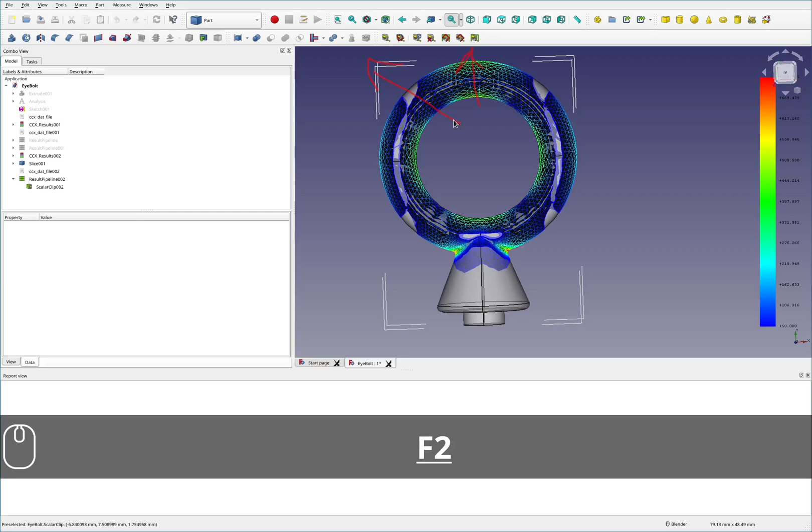Hi, welcome back. So in the previous video, we explored how an eyebolt from McMaster-Carr is affected by pulling straight up like it's designed for, and then also pulling at the 45-degree angle, which is the maximum allowable offset angle from vertical. And I figured that in this video, we would expand on that.

So in the previous video, we simulated an eyebolt and it's physically connected to the ground rigidly. And then we were pulling up here, pulling over to the side, things like that. And there are a few things that this doesn't take into account. So when you have an eyebolt like this, typically it's bolted into something. It's not just attached to nothing. So it's bolted into something, right? And it's got this thread here.

And these threads have a preload force that's pulling the entire eyebolt into the material. And what we didn't simulate was the material here flexing and kind of bending down as the eyebolt gets pulled into it. And that potentially could help with some of the forces that we were seeing, particularly in this kind of bottom section down here.

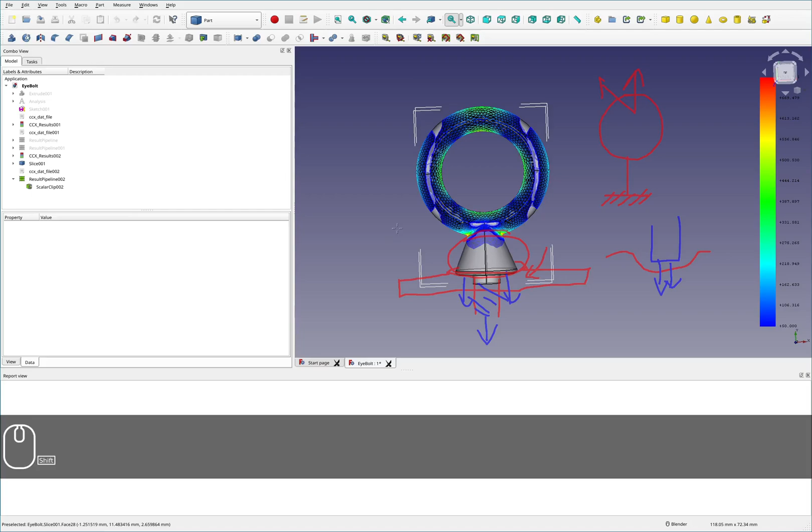So I figured today we would expand this eyebolt simulation to contain the plate below and also the preload. And we'd see if that makes any difference to our overall findings. I expect that it doesn't, but I think this is a good exercise. The reason that I think it won't affect much is because none of the effects that we're seeing are in this area down here that is being affected by our changes.

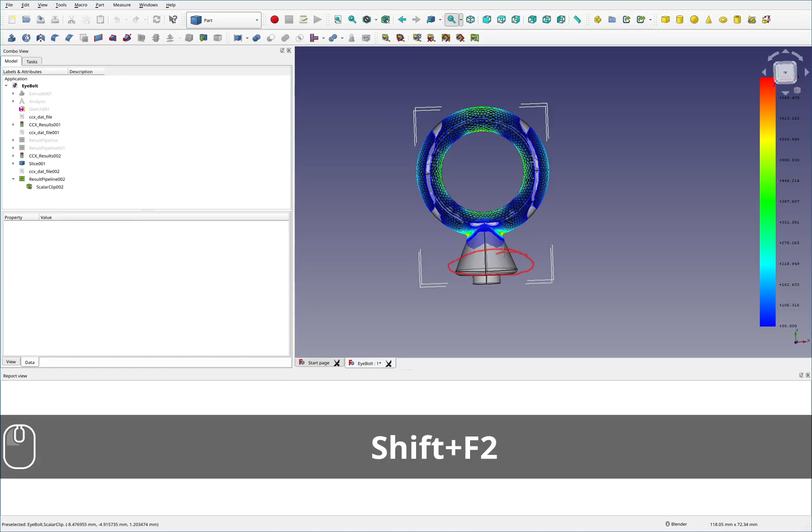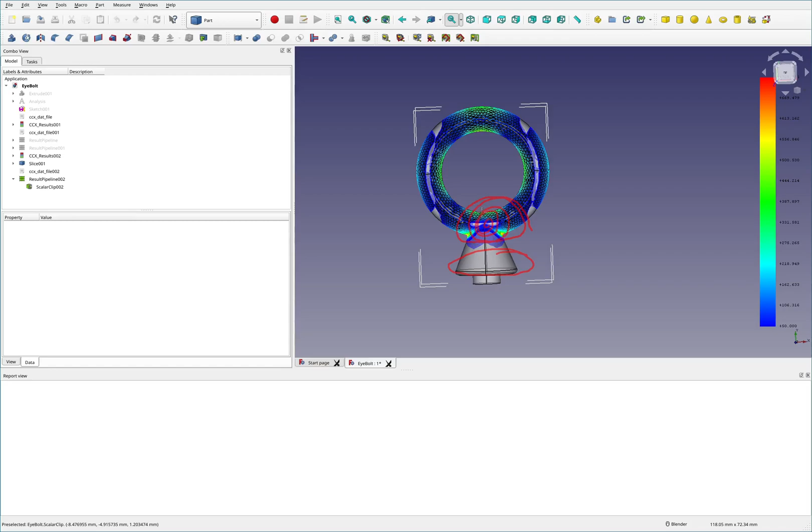So I think what we would see is potentially a reduction in force in this area. Maybe it ends up more in compression and less in tension. But overall, this concerning area up here, where the eyebolt goes from being straight up to being the circular thing, I don't think we're going to see all that much change there. But I think this is an interesting topic, so we'll move forward with it.

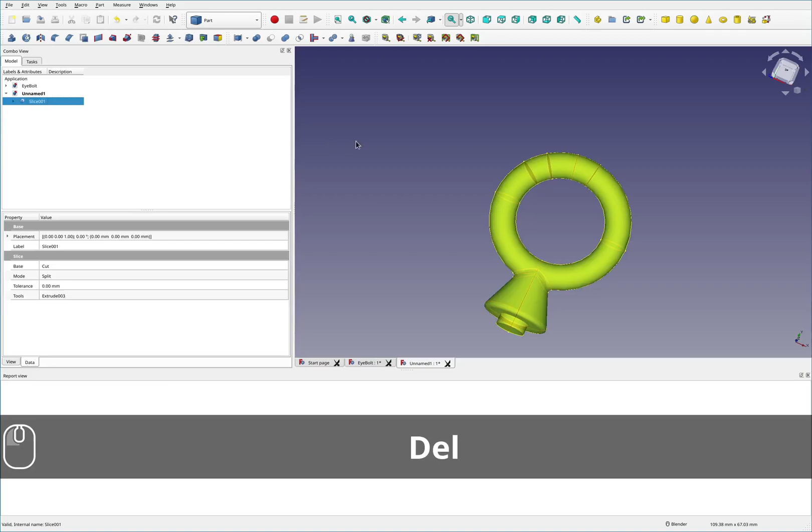Now I'm going to start by making a new file, and then I'm going to come over to the eyebolt file from last time, and I'm going to link the slice here once I find the link button. Here we go. And I'll just drag it over to the other file. So now we have two parts, I guess. I'm not sure what the second part is. Let's see. If we delete one of them, nothing seems to change. So that should be okay. I'm going to turn the opacity off on this part. There we go.

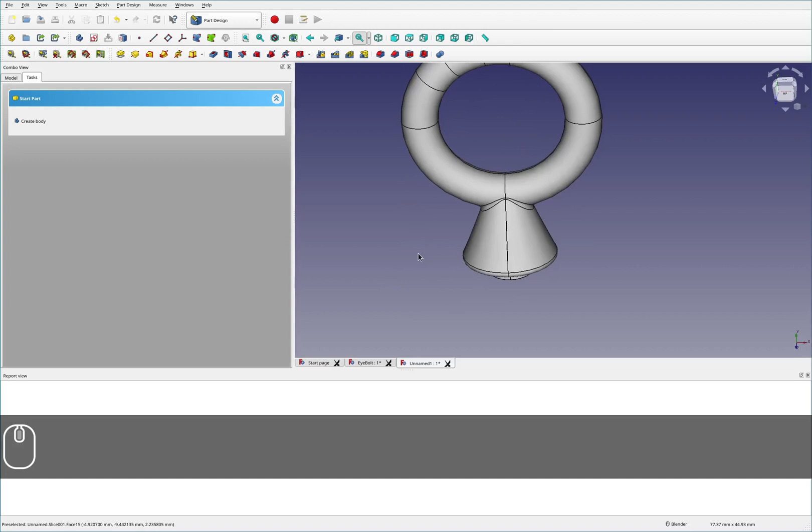And then I'm going to do a couple of things. First, I'm going to switch over to Part Design, and we're going to model this plate area that this is going to be bolted into. And actually, I think I will model this not as a square, but as a circle. And then I'll have maybe 1.5 diameters on each side so that the plate has some flex to it. And this plate thickness is going to be pretty thick. I'm not quite sure. I'll just eyeball it and we'll see if it looks good in the simulation. But that is the plan.

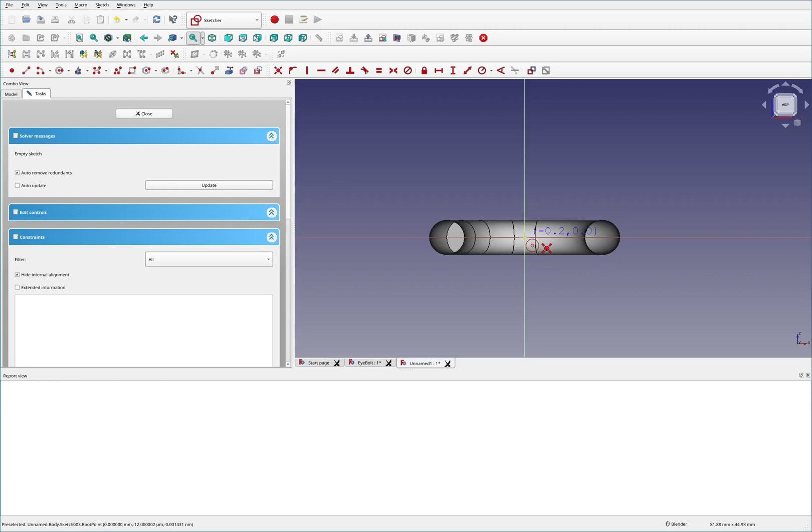So I'm going to make a new sketch here, and I'm going to cut away, and we'll make two circles. I'm not going to put material where the eyebolt shaft would go. So let's get rid of the cut away, and I'm going to grab the outside of the eyebolt. Let's see if I can grab that. It does not like me grabbing that. Does it like me grabbing any of this? It does not. So I guess we won't be doing that today. We'll just be eyeballing it.

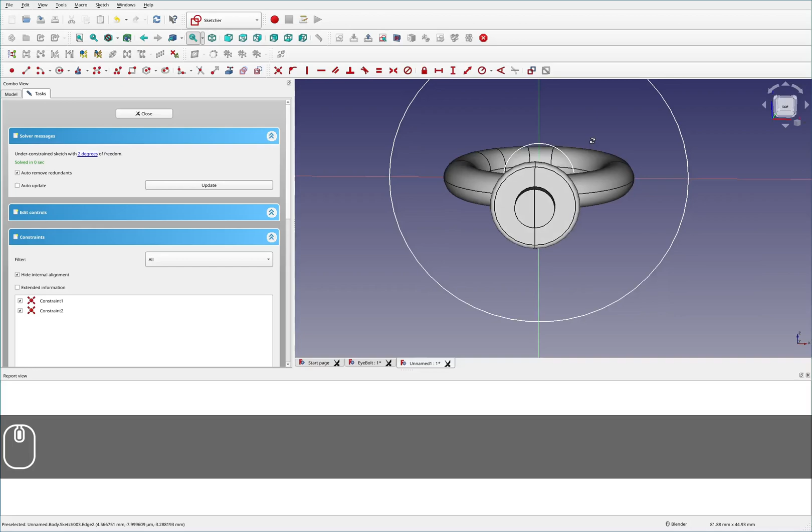But I believe, going back to a page we had from before, this is the quarter-20, so it's 1/4 inch in diameter for the thread size. And the McMaster-Carr model without thread is modeled such that the diameter is the major diameter of the thread, so the threads would be cut into this part if it had threads.

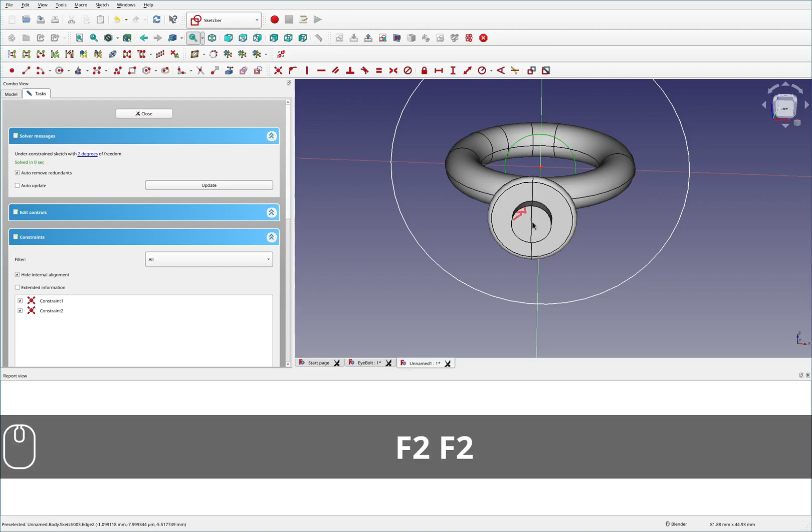So we will grab this and give it a diameter, and the diameter we'll say is 1/4, and then, oops, we need 1/4 inch. That was 1/4 millimeter. So 1/4 inch, and then we'll add just a little bit so that it's not on top of the eyebolt. Let's see if I can grab this.

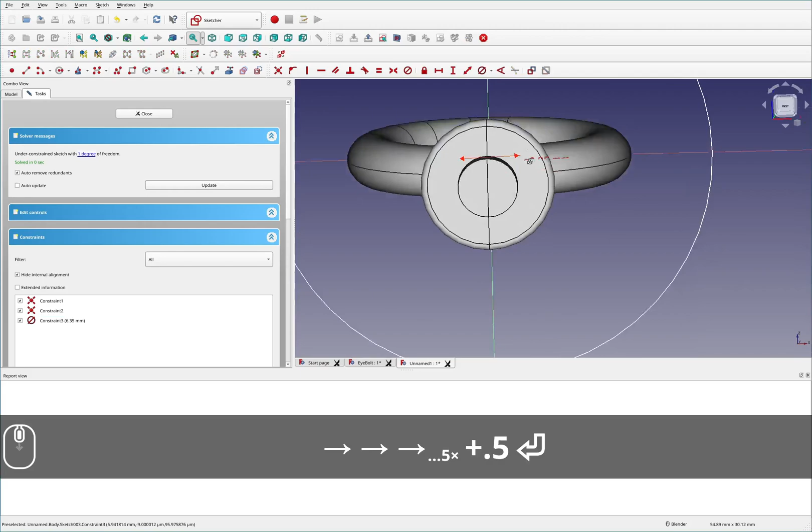Okay, so we'll add, I don't know, 0.5 millimeters. So that should be enough to get it off of the eye bolt. And then for this one here, let's see if McMaster has dimensions for the width of that. So they say that is 0.563 inches wide.

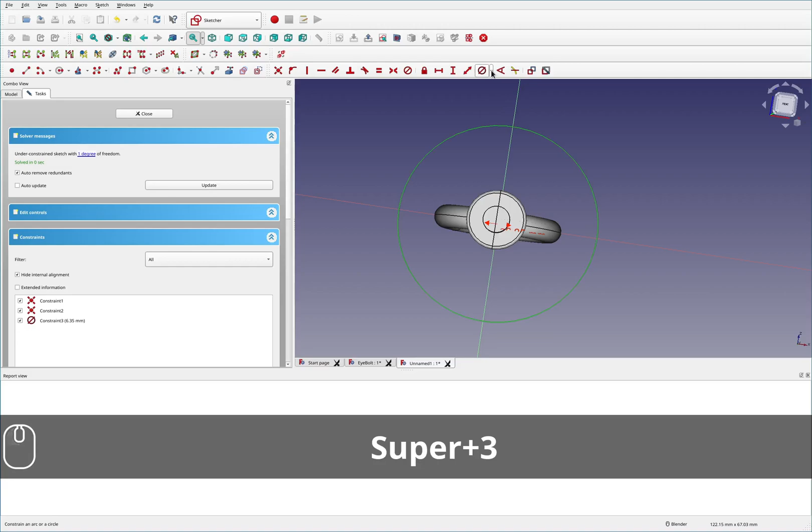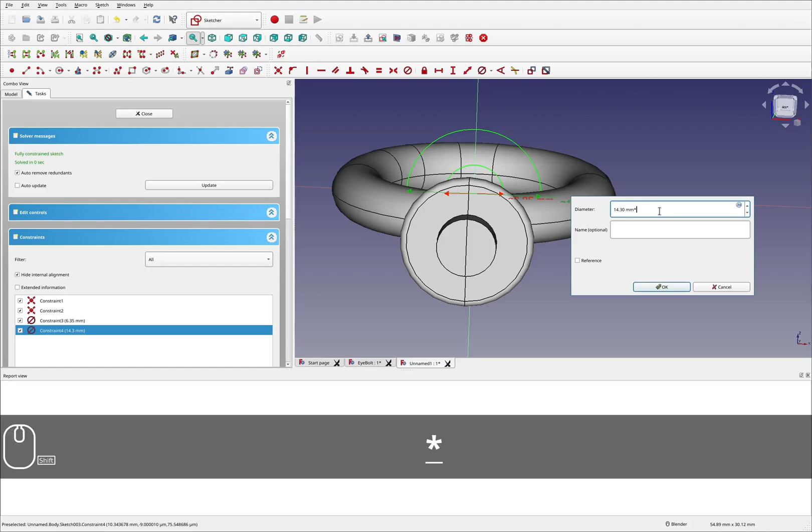So we come over here, and I want the diameter to be 0.563 inches times, actually we'll check and make sure that looks about right. And yeah, that looks about right. So come over here and grab this. And if you recall, I need another 4 diameters. Did that do anything? That did not do anything. So let's grab it again. And we need times 4. Oops, maybe it's because I put it on the right side of the number.

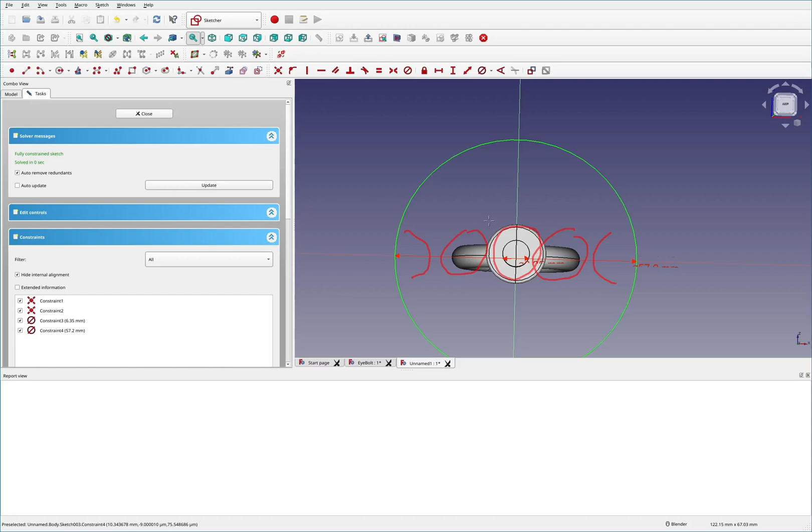So times 4. And the reason I chose 4 there is so that I have 1 diameter in the middle, and then 1 on each side, and then an extra half diameter past that. So I think that's going to give us enough area to properly model the plate without having the boundary conditions affect too much.

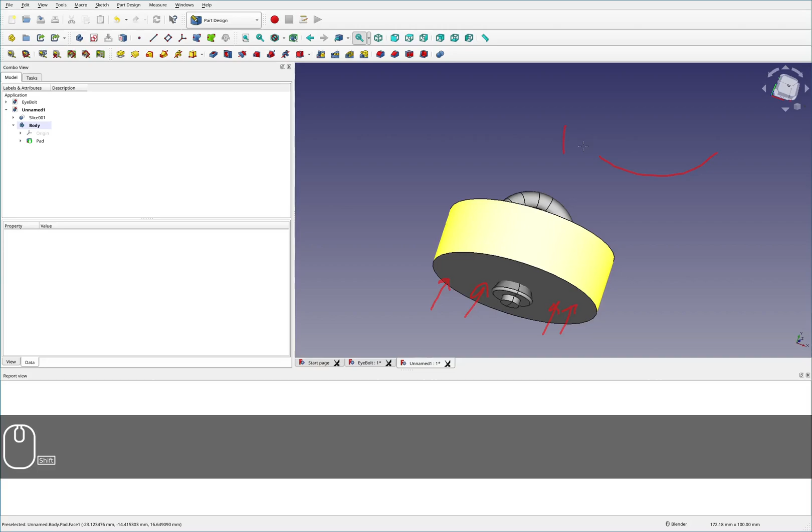So then I'll pad this, and let's say 35. Oh, that's pretty thick, maybe not that thick. How about 20? I want it thick enough that the boundary conditions don't affect the rest of the plate. But since I'm not planning on pinning the bottom surface here, I want it thick enough that it's not going to bow down too much in the middle, because that wouldn't be a great simulation either. But looks like we're doing good here.

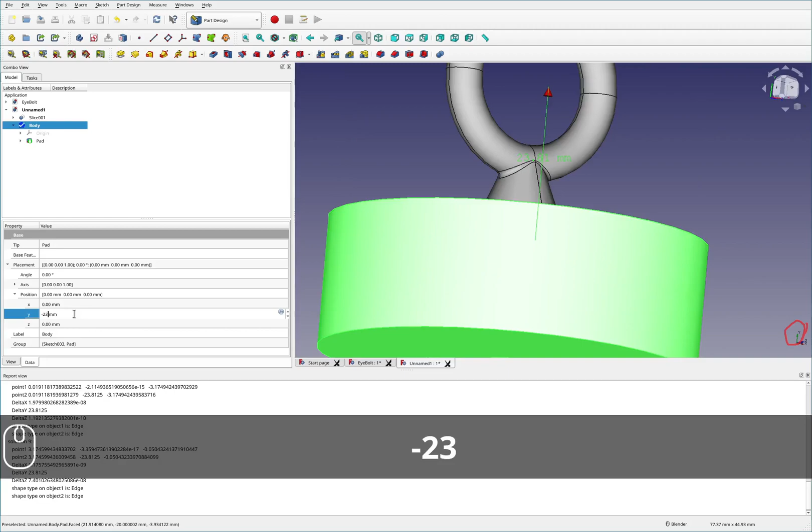So I'll grab the measuring tool because I need to move this down to where it actually is supposed to go. We'll measure the distance between these two, and 23.81 millimeters is the distance we need to move it. So come over here to body, placement, position, and I need to move it in the Z direction, or the Y direction. So we come over here to the Y direction, we need minus 23.81, and those two should be exactly lined up now.

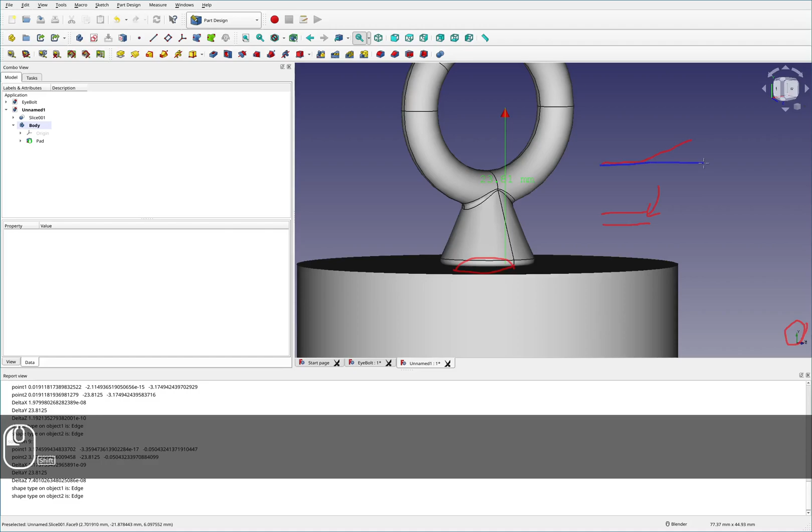They look pretty good. And the reason I am not offsetting this down, so there's a little bit of gap in the middle, like I did with the inside eye bolt part of it, is because I'm pretty convinced that because of the preload, these two surfaces are going to end up in contact. So I feel pretty confident that we can just bind these two surfaces together using the meshing tool, just by putting them on top of one another.

Instead of doing this type of thing where we'd have to use the contact tool, and that adds a lot of complexity to solving it. It makes your mesh more difficult to solve. There's more constraints required. It's more difficult to converge. So it's just a big hassle, and I want to avoid big hassles at all costs. But I think we're looking good here.

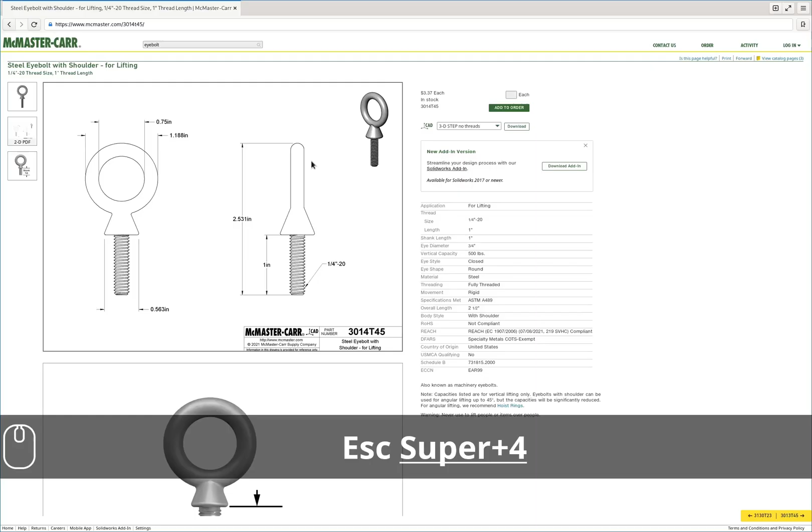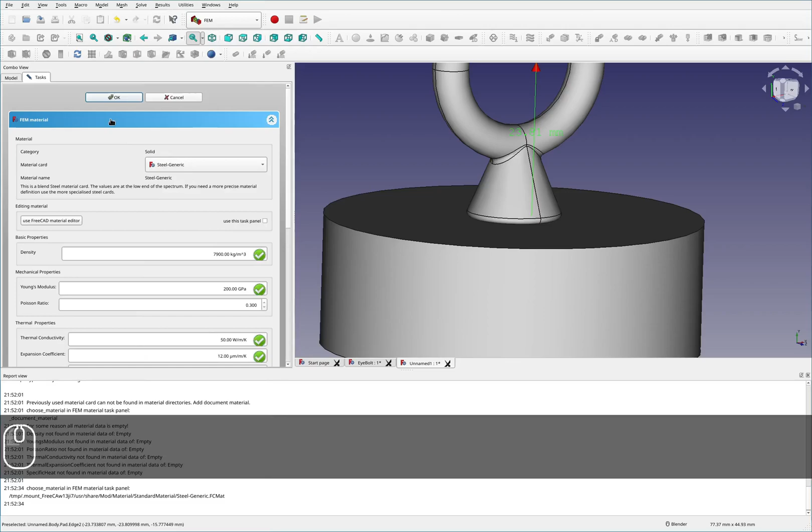So I'm going to switch over to the FEM workbench and then get an analysis block and a material block. And if you recall here, I believe this part is steel. Yep, it says right there, it is steel. So should be good to just grab steel generic. Let's see, where is steel generic? Here it is. Okay, so both these parts are steel generic.

I think that's okay, since the eyebolt obviously is steel, but then the plate is not super important for the simulation because it's so thick. It wouldn't really matter what material it is as long as it's got some amount of stiffness. So we've got that. We need some boundary conditions here. So grab the fixed boundary condition, and I'm going to fix the outside of this.

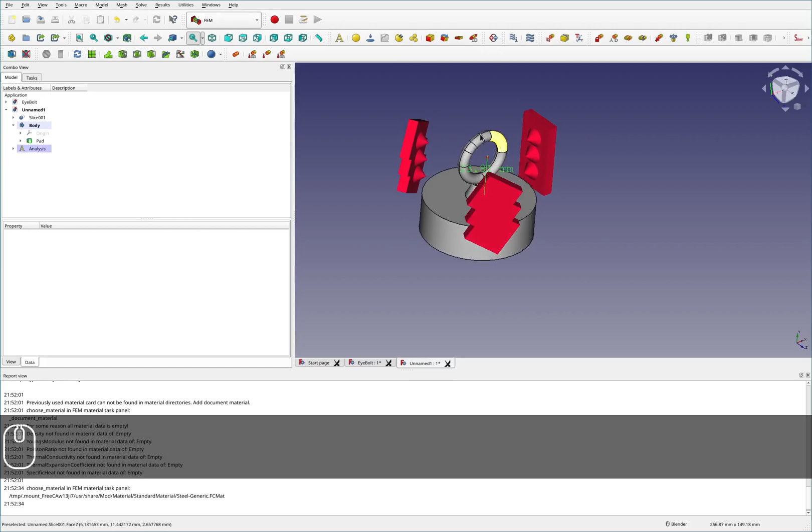And let's see, grab the force boundary condition. We will grab these two faces here. And then for the direction, I need to grab the sketch with the direction in it. I believe it is this one. So grab the link tool, and we will drag that one onto this other project also. Once again, it's imported two bodies. So I guess we will leave it at that. Open up the analysis and the constraint for the force. We will select a direction.

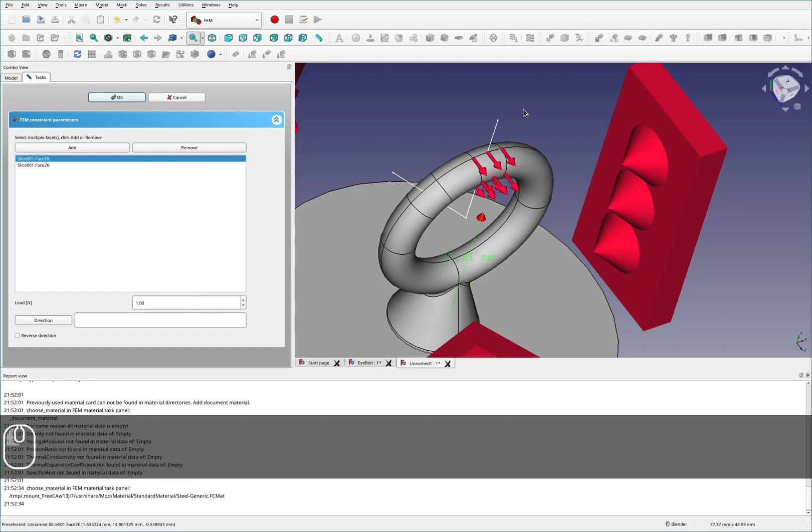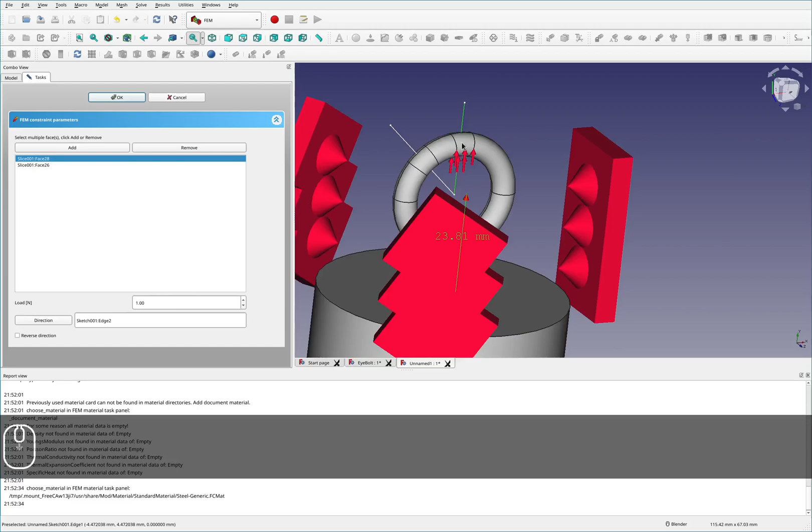Let us see. Direction does not like it. My guess is it's something to do with this second sketch. Let's delete that one and we will base it off the original. And select that. Direction, yes, that was our issue. Okay. And then, of course, we need the preload force.

So I'm going to look up the preload for a quarter 20 clamping force. Clamping force is a similar thing to preload. And let's see, these guys say quarter 20 clamping force is approximately 500 pounds. So let us move forward with that assumption.

Sorry that took so long. I probably should have prepared that.

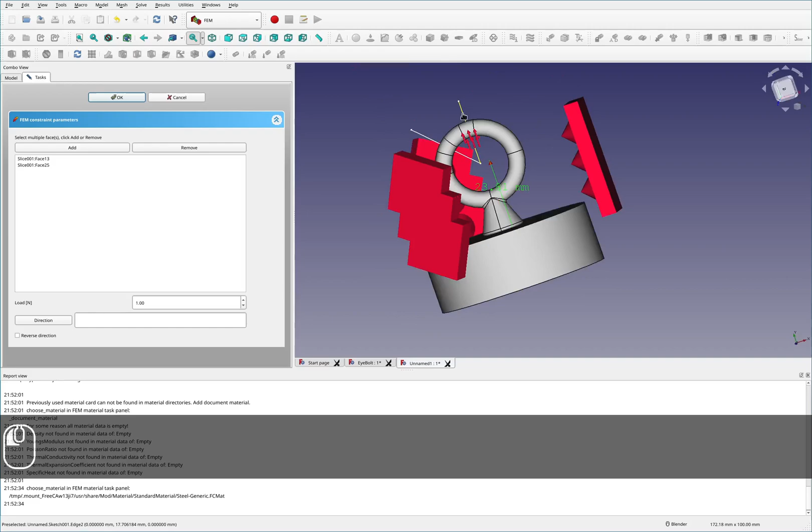And let us see. Grab the force constraint over here and grab the surfaces on the bottom. The direction can be this one, but in the other way. Okay, and the force in newtons, so we need pounds to newtons. Let's see, pounds to newtons, and 500, which is 2224 newtons.

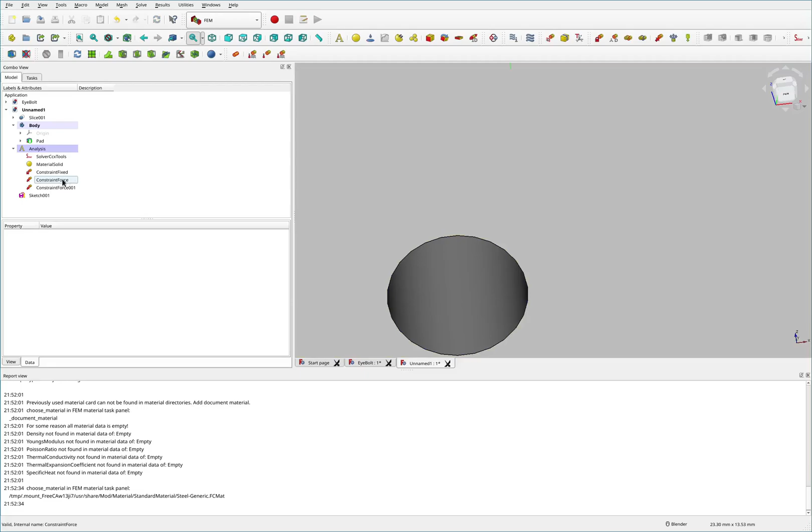So 2224 newtons. Okay, and if you recall back to our McMaster-Carr bolt, the vertical capacity is also 500 pounds. So that is 2224 newtons also. So we will put 2224 newtons in the vertical direction.

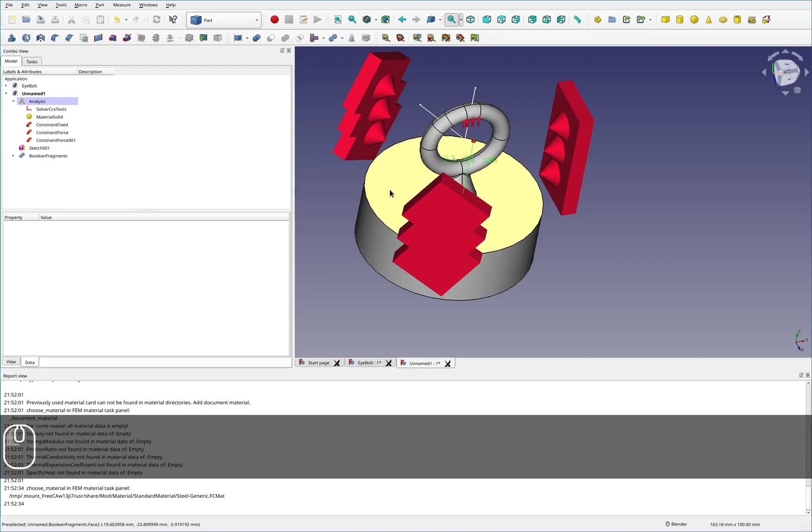Alrighty. And lastly, all we have to do is mesh our system. Oops, I've actually forgotten to combine these two things together. So we'll do that quickly. Come over here to Part and Boolean Fragments to merge the two shapes together. And let us see, we probably have to go through and fix our constraints.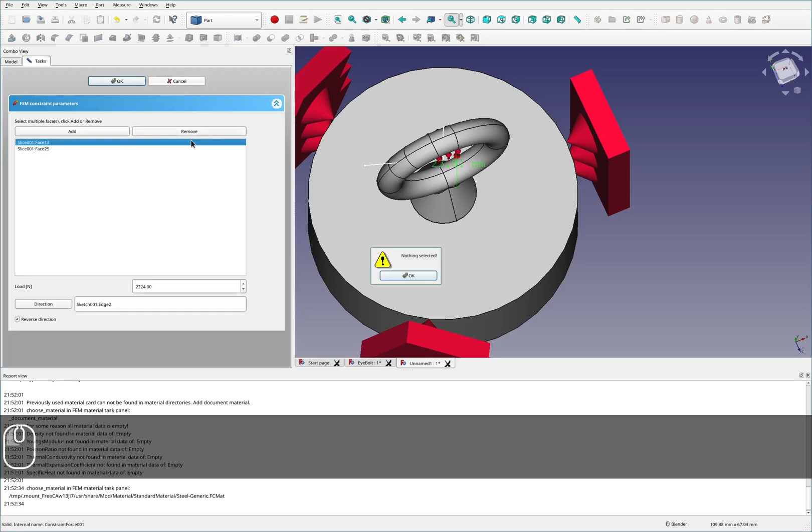So this one here, okay, the force constraint, remove that, remove this, select those two faces again, add them back, and for this one we will remove both faces, and then come down here, and add those back. Alrighty, and now we should be good to mesh it.

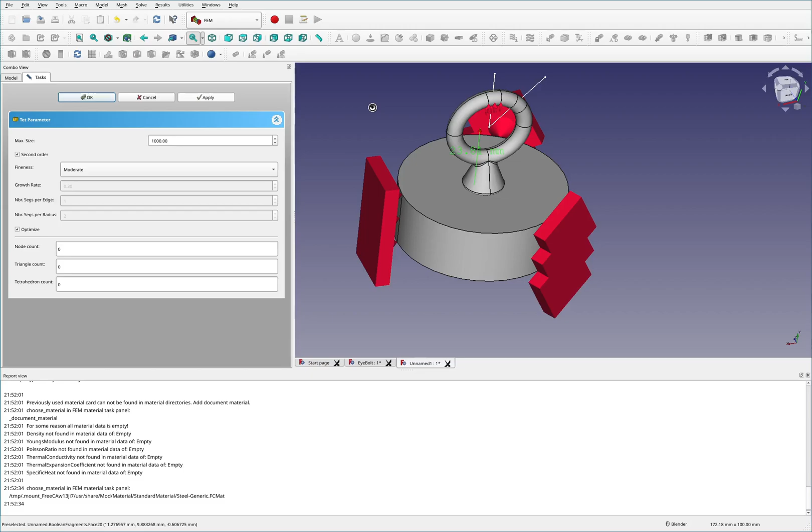So switch back over to FEM and mesh, and we'll see what it spits out to begin with. Before, as I recall, it was a decent mesh, so hoping that this one is also decent. Seems like it's taking a bit longer than one would hope, so it's possible that this is going to have some type of issue. It's quite concerning, but I guess we'll let it think, and we'll come back when it's done.

Okay, so let's see, it is finished here. Looks like it's decided that it needed a pretty tight mesh around that corner. So we'll click OK on that. And I just want to take a quick look at this mesh before we get too far along here. So hiding the Boolean fragments. And let's change the appearance of this mesh and give it a little bit of transparency so that we can see through to the other side.

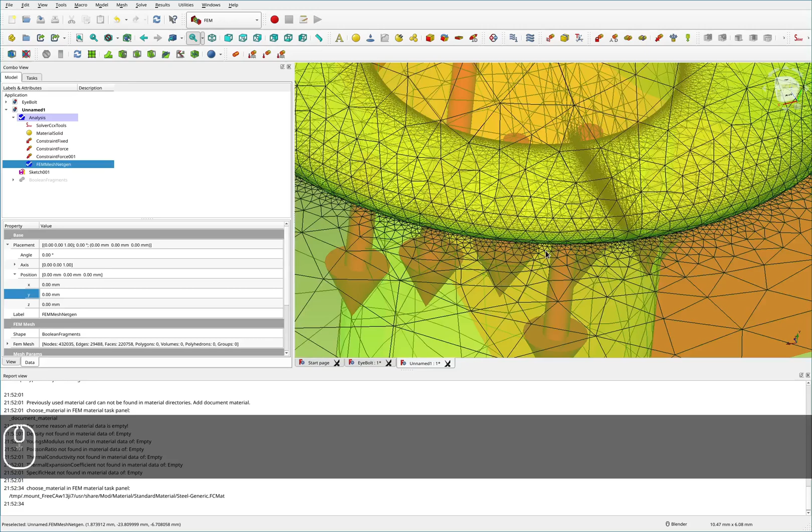Okay. And it is quite slow. But I believe it did what we're looking for. Looking at it, it looks like it's just a very tight mesh around this area here, which is not quite what we were looking for. I might change the minimum element size to get rid of this madness, because this is going to take like a million years to solve. So that is no good. So get rid of this mesh and try again.

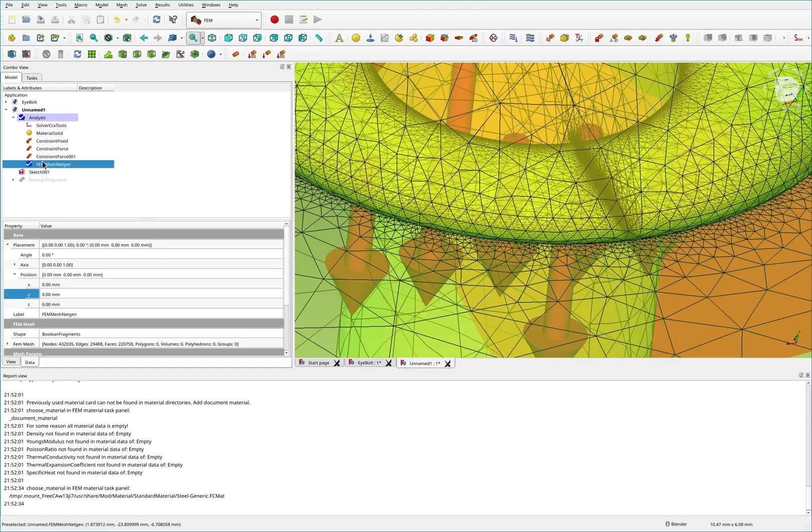Alrighty, so it looks like it finished deleting itself there. So we can come in and get a new mesh, and let's see. I am surprised that there is no minimum element size box. So I suppose we want to have a very coarse mesh, or maybe user defined, and let us see. It's possible that we go in here and we just delete these two faces and call it good, because those two faces seem to be where the issue comes from. But I guess we will see.

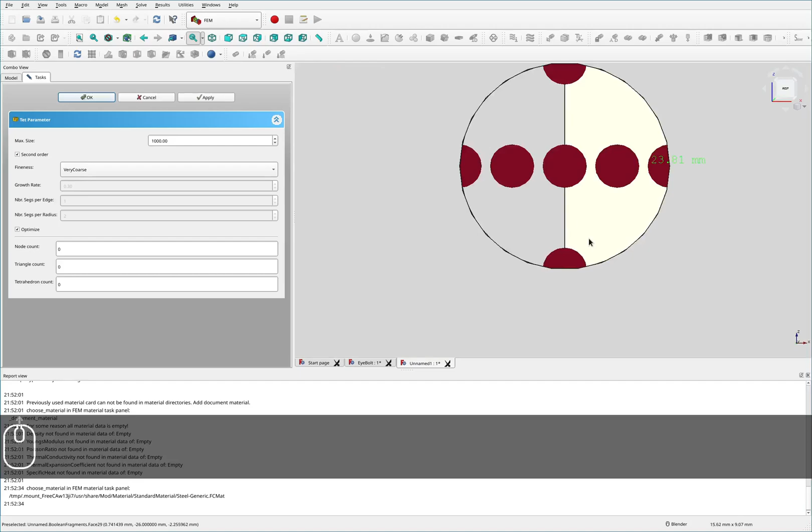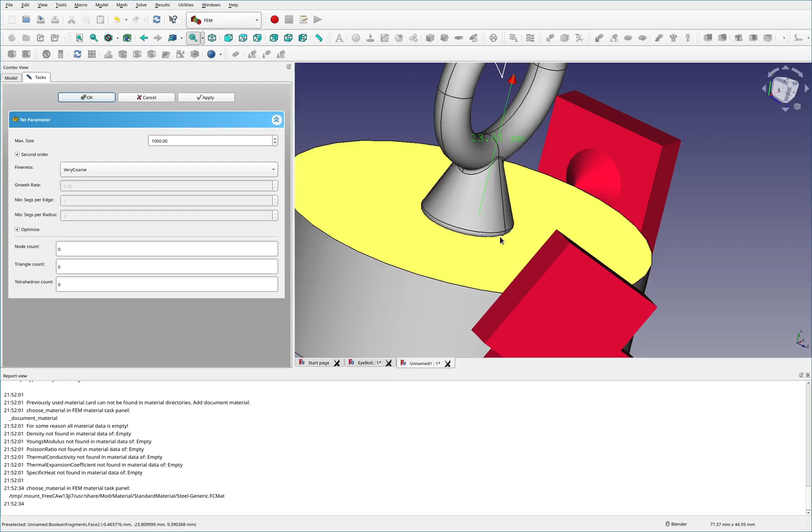It's also possible that these two faces are a bit too close together. So that's another area of concern. But overall, I am unsure. So what do we want to do? Let's try and get rid of these two curved faces here, because those are, I think, causing us issues.

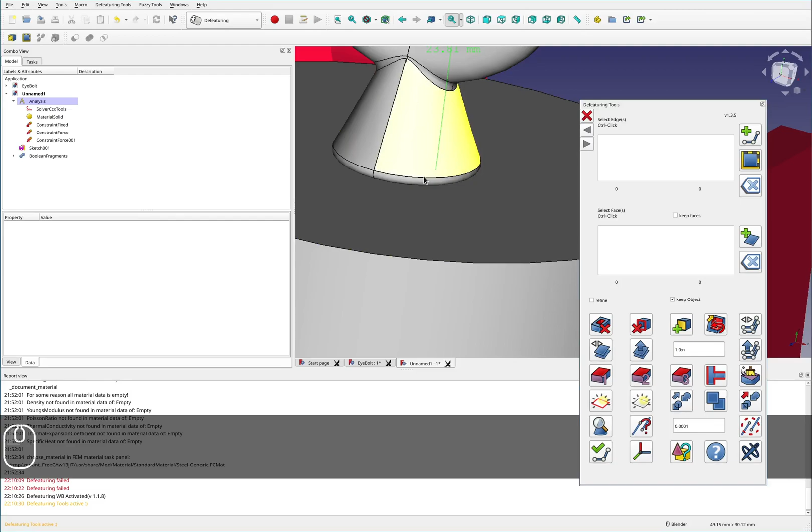So I'm going to come over to, let's see, there is a defeaturing tool here, I believe. So we will try it out. I believe it is this one, remove feature from shape. I've had luck with this in the past. We'll see if it works here. It's not seemed to have worked. We can try that again. Okay. Well, let's move over to the defeaturing workbench. This, I believe, is a workbench that you install separately. Oops, it has disappeared.

Okay. I obviously don't use this very often, so well, let's get rid of it and let's bring these back over to the side. Okay. Bring the workbench back. Okay. So this face, and I want to remove faces. That one, I don't know.

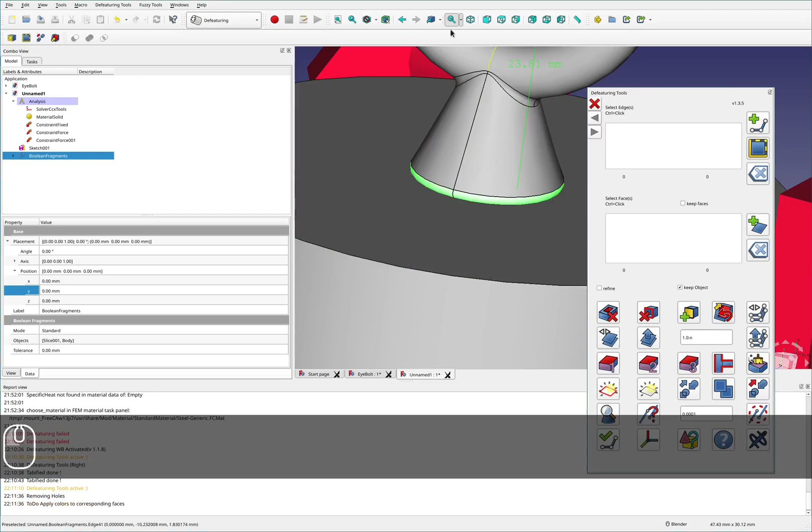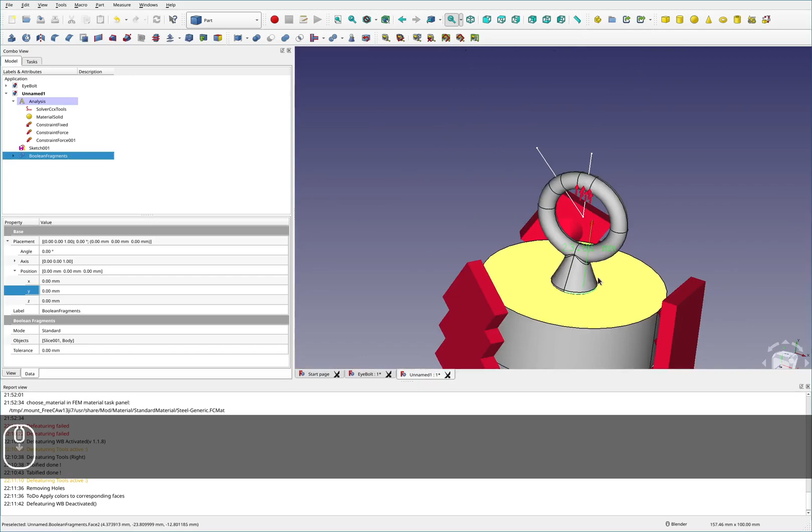Well, let us give up on defeaturing that part. It's possible that because it's imported geometry, it doesn't work quite the same as if it were created in FreeCAD. This might have been brought in some kind of funky surface. So switching back over to FEM, let's see. What shall we do? What shall we do?

Let's come over here and let's grab a user-defined and segments per radius. Let us see. Segments per edge, growth rate. Let's mesh it with a very coarse mesh, and we'll see if that changes anything. It's possible that we have to go back and modify this geometry to be easier to mesh.

And it's unfortunate the FreeCAD meshing stuff, or at least the FreeCAD meshing that I'm seeing here, doesn't have too many options for forcing the mesher to mesh in a certain way. Preferably, I'd like the mesher to maybe do 30 nodes around the outside here, and then also 30 nodes around the big outside there, such that this is kind of a bunch of beams, you might say.

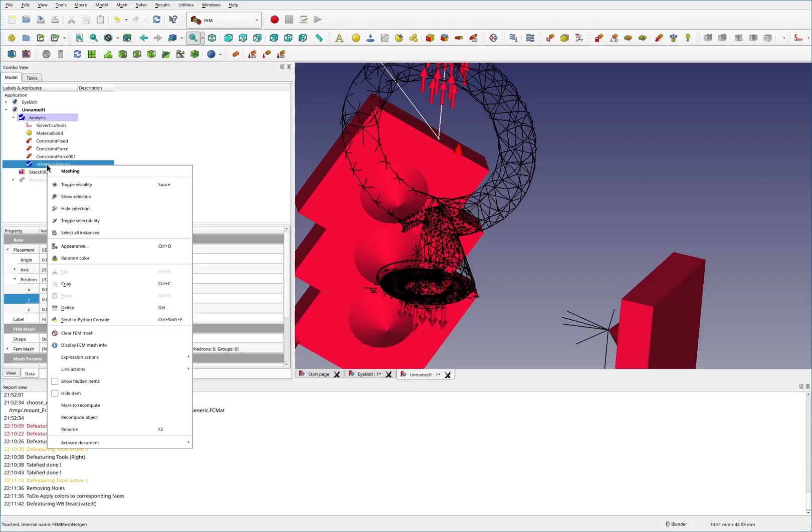Let's see. It's less crazy than before, but it still seems to be pretty fine around that contact area, and maybe that's okay. Maybe that's what we want. I'm not sure. But let's take a look. So it seems like it's pretty fine, especially around the contact area.

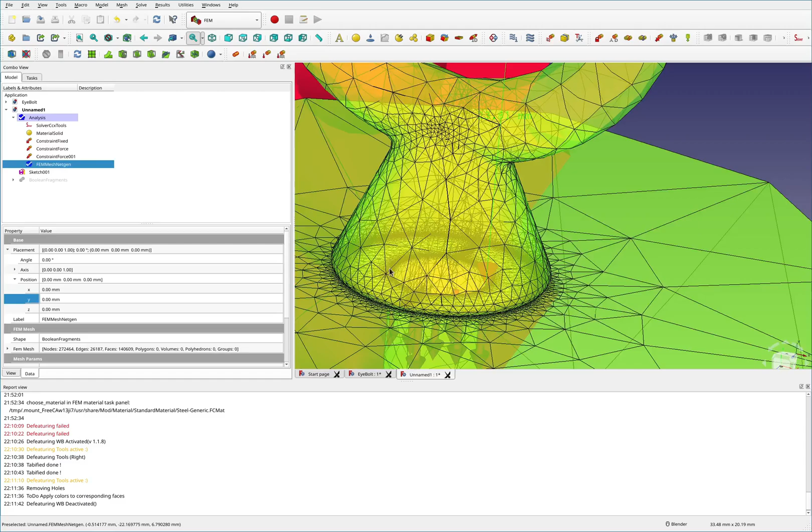We might do something funky like move these two parts into one another, and that'll get rid of this odd contact surface. So I think let's go ahead and do that. So that will require, let's see, redoing our Boolean fragments here. So I will go ahead and delete that. Get us back our two separate bodies.

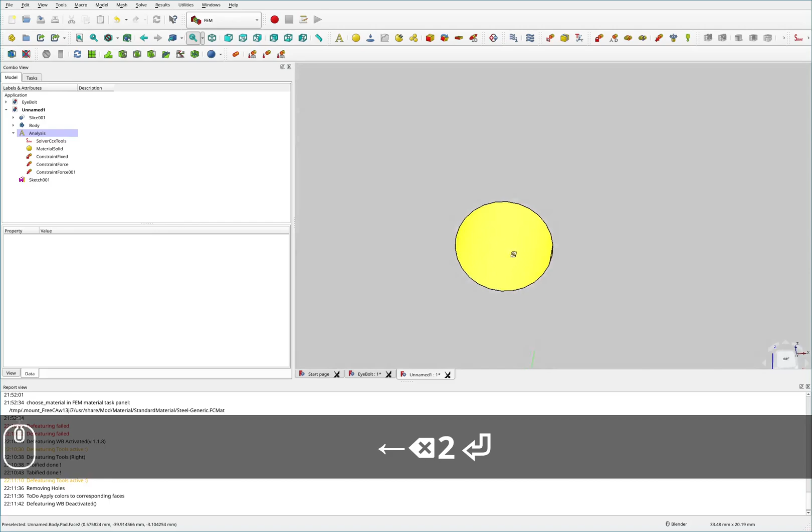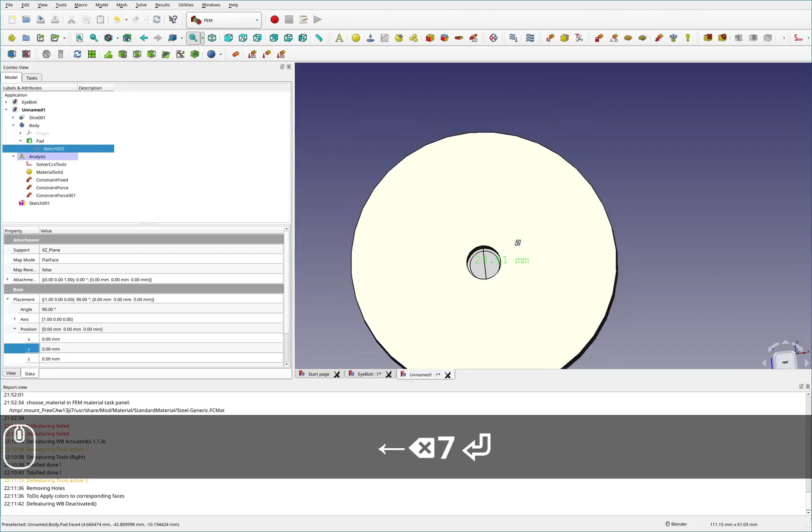And then I'm going to grab this body and we'll move it up maybe 1 millimeter. Okay. So moved up 1 millimeter, and I'm also going to go in here to this body and edit this sketch and make this inner diameter slightly bigger. That might also help with our issues. Okay, so if we look down here, we can see there's a much larger gap, but that gap shouldn't make all that much of a difference.

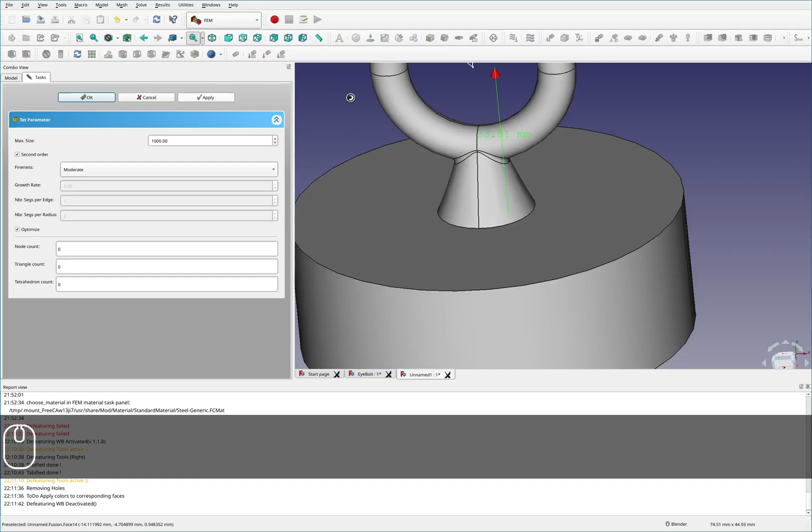So then I'm going to switch over to Part, grab the two shapes, and Boolean combine them. Okay. So now I've got this fusion shape here, which is kind of similar to what we were doing before, except instead of two shapes in the same body, it's one shape now. So this mesher shouldn't have any issues with this, I believe, but we can check that real fast. So FEM, the meshing tool, apply, and fingers crossed, oh, so much faster. Let's see. It is an okay mesh.

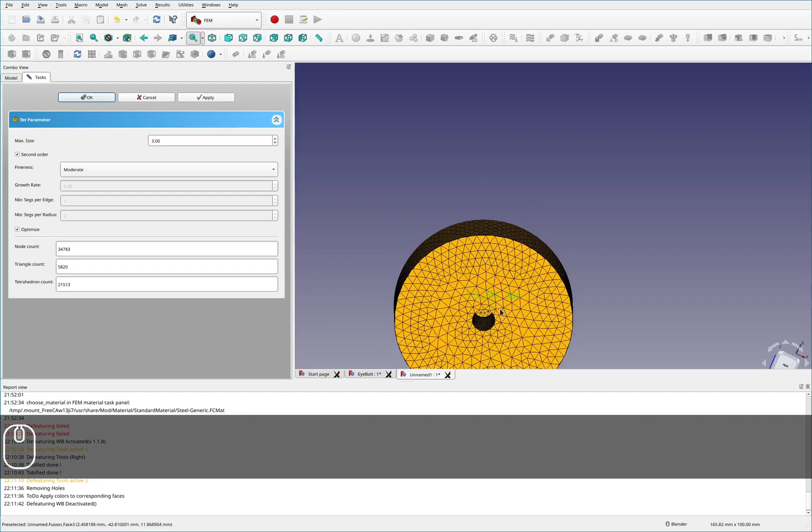I might change the maximum size to be slightly smaller, maybe 10 or so. Let's see, I believe that this section out here is too large, so maybe we take it down to 5. I'd prefer to have kind of an even spacing of nodes, maybe even smaller than that. Let's go like 3. Okay, that looks pretty good. Let's come down here and take a look at this. That looks pretty good. This is all looking pretty fantastic.

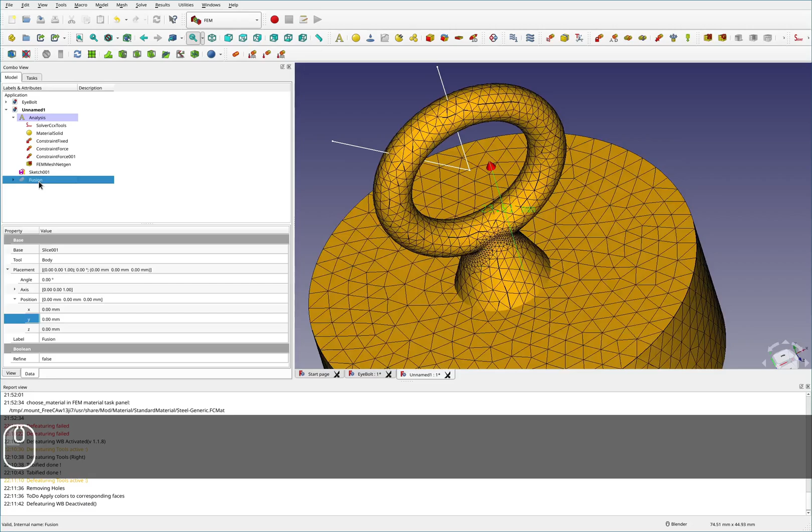Okay, so then we grab the constraints, except we need a shape that we can actually select for the constraints. So add a constraint. This is the fixed constraint on the outer surface, and then a force constraint on these two surfaces. Okay, and the second force constraint on the bottom surface.

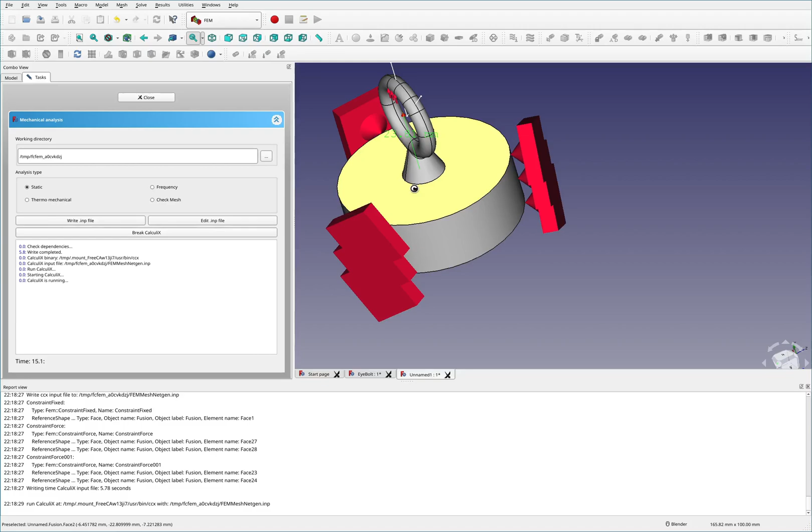Okay, and then I believe that is everything, so we should be good to run this. And since we fixed the issue with the very, very intense mesh we had earlier, I don't think this is going to be a super crazy long simulation. If we were simulating contact, that would probably be a completely different story. This would probably take forever because you'd be simulating on those very fine meshes, and you'd be simulating contact, which is very, very difficult. It takes a lot more steps to simulate. But let's take a look at the results.

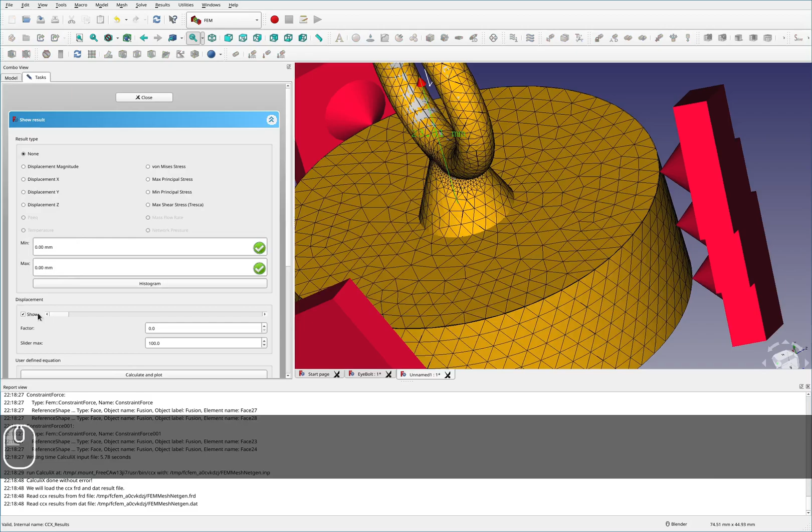So look at the displacement here. We can see that this part is moving up and the rest of this is basically not moving at all. Take a look at stresses. Looks like our maximum stress is pretty large and the rest of this is not super big. It appears the maximum stress once again is in the corner there. So that's about what we would expect. That's kind of a concentrated stress caused by the energy flowing around the edge of that fillet. But that's okay because the bulk material here, as long as it's not all yielding, would be able to take that up.

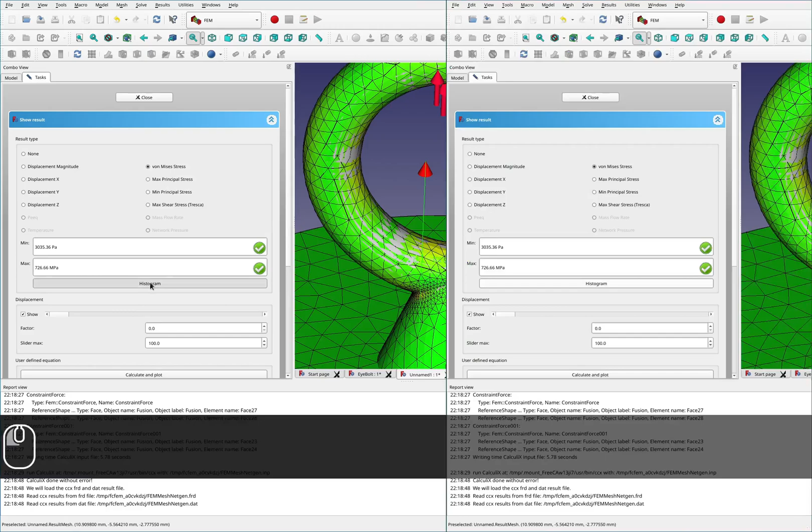We can look at the histogram and we can see that the majority of this material, I believe 250 is where we considered it yielding before. The majority of the material is not yielding. So we can come over here, grab a deeper analysis into this. I will copy these results so that they're separate from the results that we had before and add in an analysis pipeline. And then in this pipeline, we will grab the clip filter once again. We will clip based on von Mises and at 250, which is the yield point.

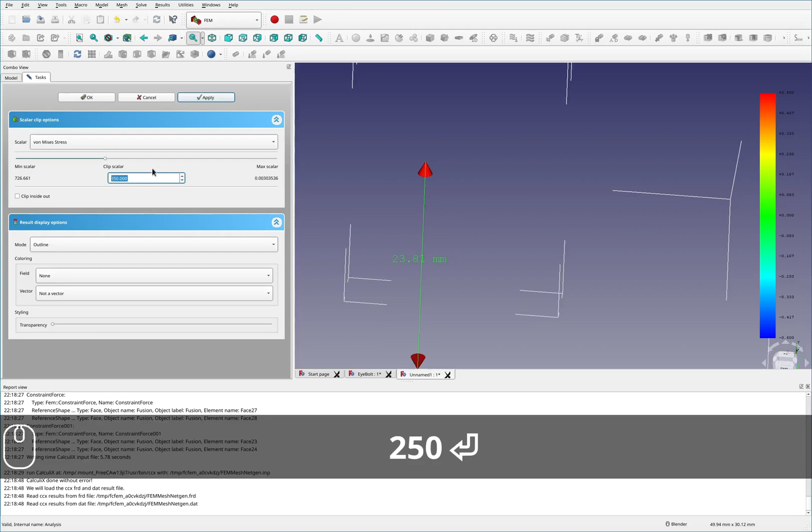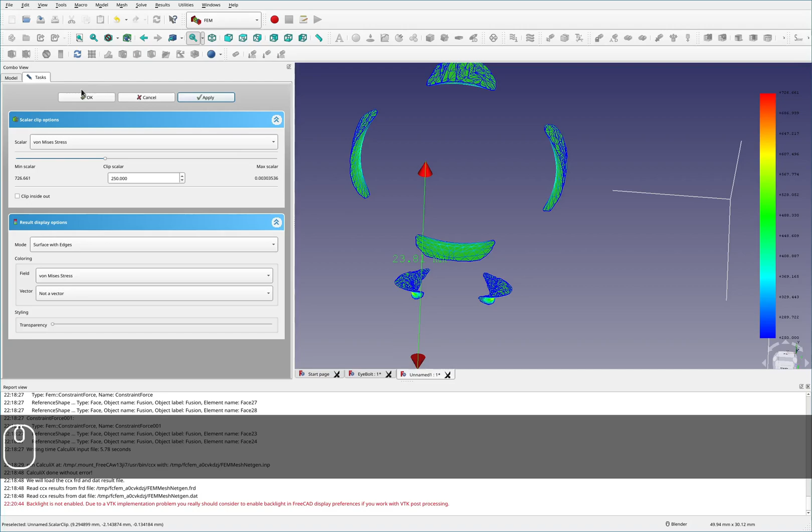Alrighty. And let's see. Oops, outline, we want surface with edges. And for field, von Mises vector is okay. Alrighty, and as we can see, it looks very similar to before. We've got these two areas up here. And those are caused by our force, so they're kind of fake areas. It's just because our force is concentrated in that particular section.

And then we've got these kind of very thin surface ones, but those are okay because the bulk material will handle the rest of the load. So no risk there. This section here is okay for the same reason. The bulk material will grab the rest of it. And then these fillets here are just stress concentrations. So those are okay, because once again, the bulk material here is not yielding. So there's not too much of a concern there. Overall, very, very similar to what we were looking at before.

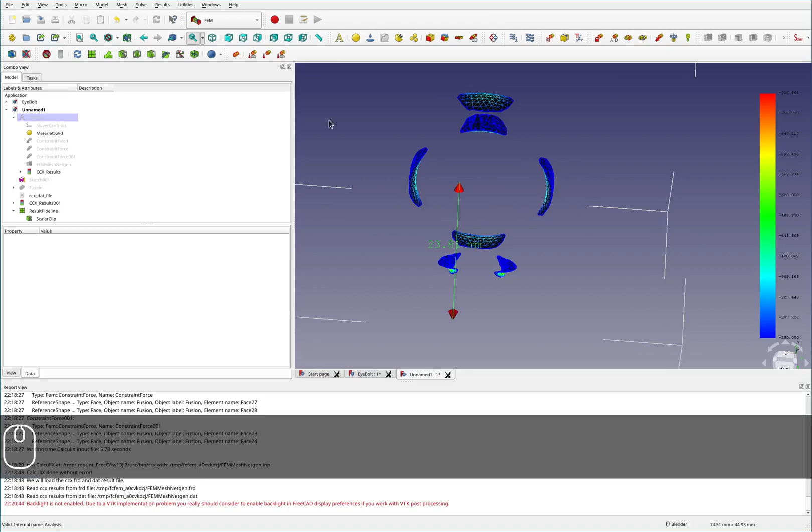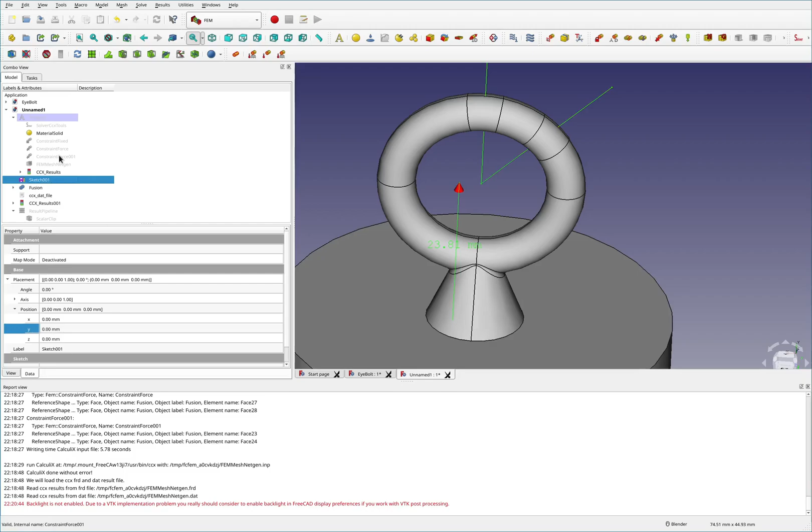And let us see if we grab this, hide the pipeline and the other results. And I want to change the force here. And let us see, I need one more thing, this sketch here. And the constraint force, we will delete these two, add here and here. And then we will change the direction of it to this one. And it looks like it's going in the wrong direction. Actually, I might have grabbed the wrong force here. I guess we will see.

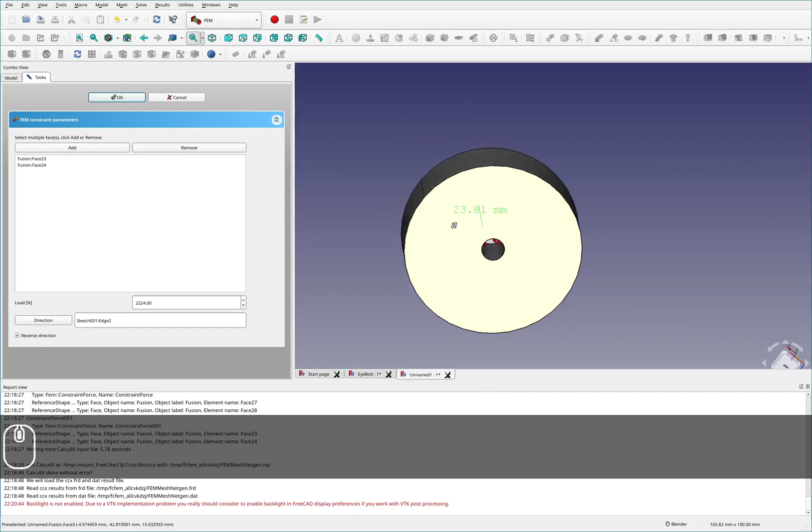What is this one? Oops, yep, I did grab the wrong force. So let's come back here and we will put this one back on the bottom. And we'll set the direction back to what it was before. And I believe it was reversed, so it's pointing down. Okay. And then the constraint force here, which is the one we should have actually been changing, we will change. Grab those two. And this direction here. Alrighty. And then I believe that is it. So we will rerun the solver.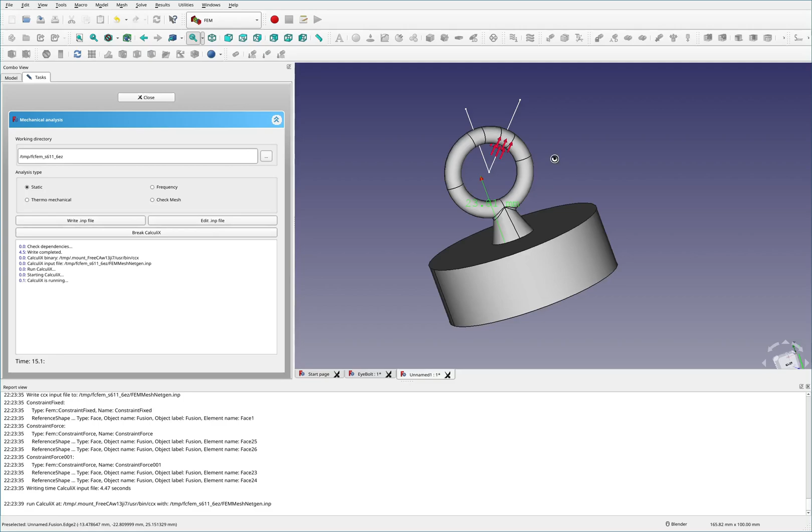And I believe what we'll see here is that the constraints that we did on just the eye part of it were good enough to simulate the rest of the material, good enough for this particular setup. And the rest of the material is so strong that it runs no risk of yielding. And in fact, this is probably very similar to the one we ran before, because the force going up here and the force going down here cancel each other out. So this pinning force from the side is probably not actually contributing much. But I guess we will see.

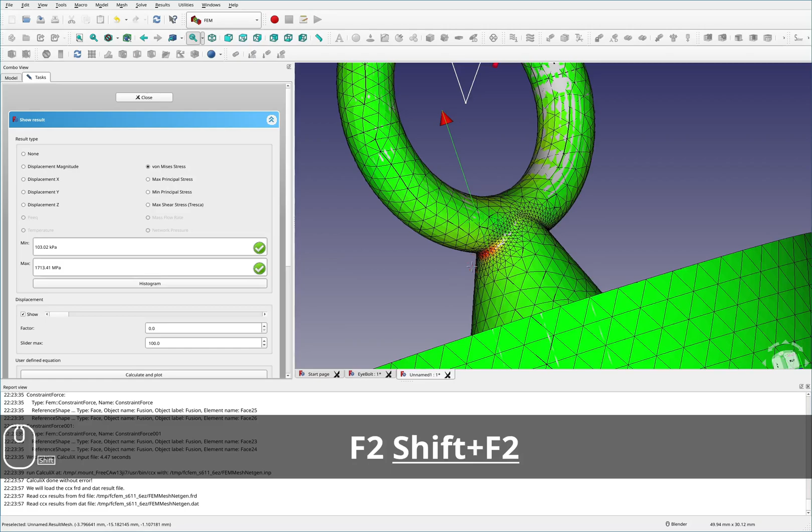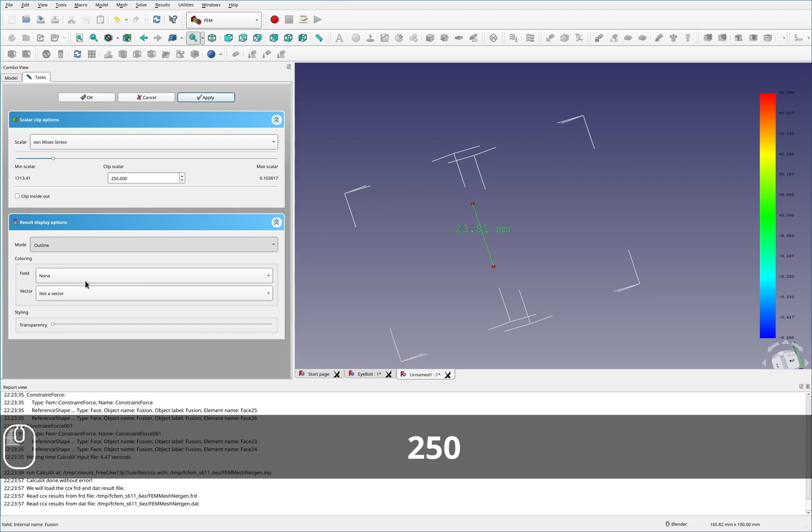So taking a look at the results here, von Mises, we can see that they're quite high once again. And once again, it looks like our highest spot is the fillet here, as would be expected. Take a look at the histogram. So 250, we get quite a few bits here that are yielding, but still, most of it is not yielding. So we're going to have to take a further look to determine whether this is okay or not. So I'll set up a results pipeline, and in the results pipeline, grab myself a scalar, von Mises clipping at 250, the mode surface with edges, field von Mises.

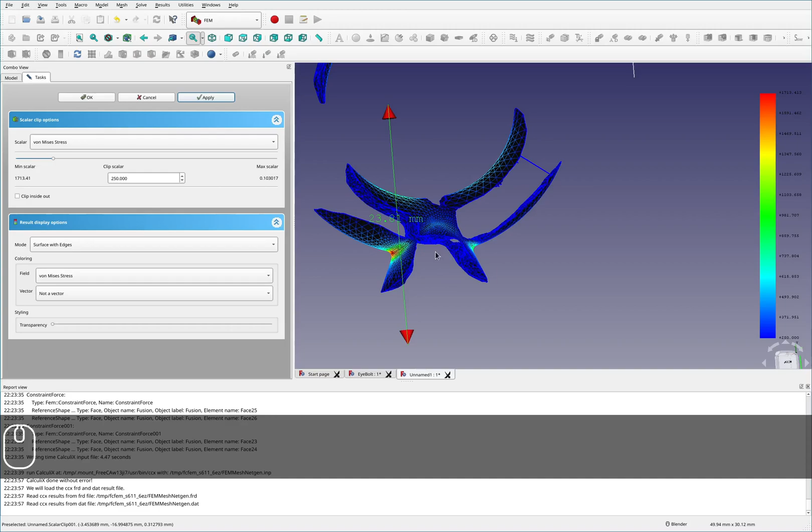Okay, and let's see, it's looking quite similar to before. It appears that in this particular setup, we're not getting quite as much stresses down here as we were before. Let me see if I can go grab the results that we were looking at before. So let's see, which one would it be? Would it be this one? Too many questions, too many questions. Let's see, which one of these is doing things?

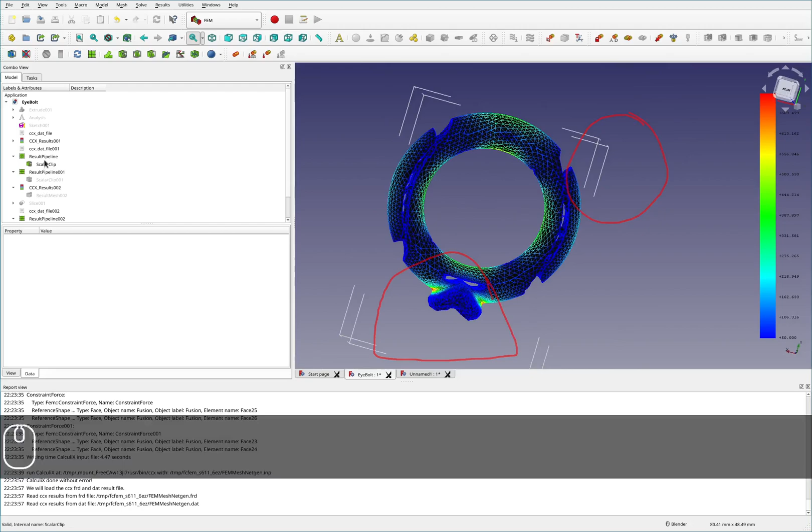So it appears this one, I believe, is the bending or the pulling from the side. You can tell because this is over to the side here. And this one here is, let's see, appears to be pulling from the top, but I believe this is the one where we increased the factor. So let's put that back to 250 so we can get an accurate comparison.

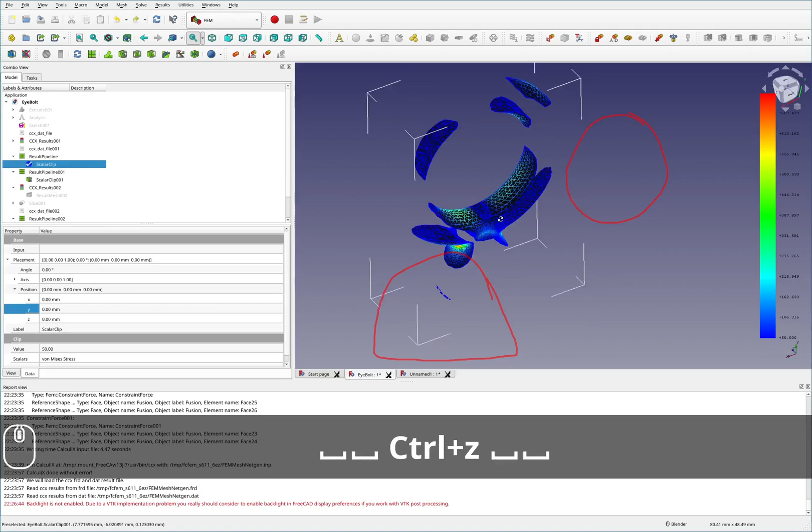Oops. Well, it looks like it disappeared on us. So we'll just compare this horizontal, or I guess 45-degree version. But from right here, I can see that they look almost identical. So we switch over to this one. You can see that we've got this same kind of feature on the top here, where it's got this divot in it. And then you've got this same kind of yielding cave formation here, where on the other side there's kind of like a slot. So overall, very, very similar.

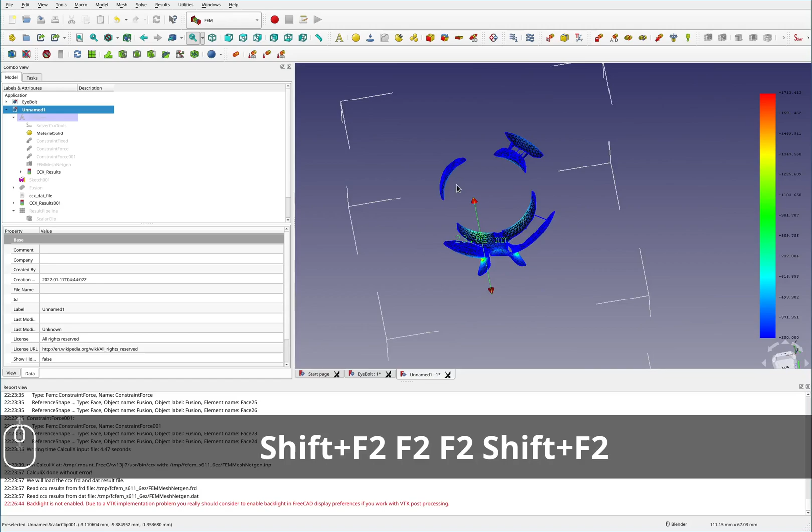See if I can flip back and forth between the two of them. I guess it's possible I could copy this one here over into the other file. So we'll see if I can do that. Oh, there we go. So you see these two are basically identical. Very, very similar. A few kind of odd things here, but those are, I guess, outliers probably with the mesh.

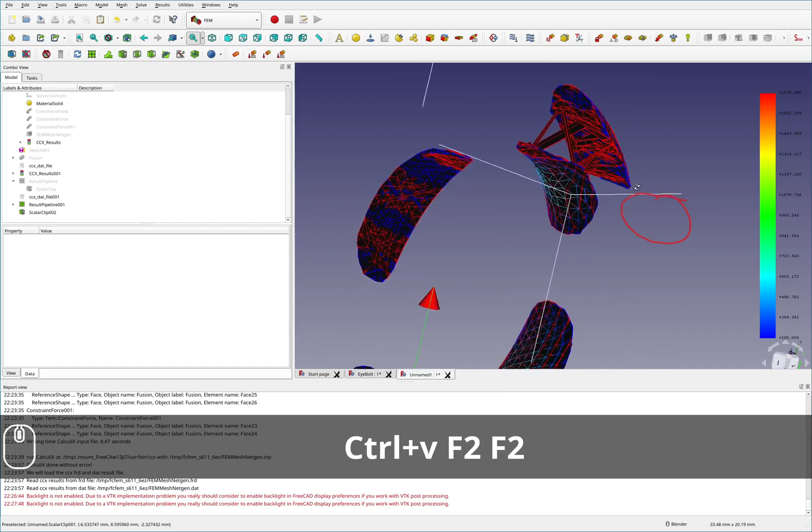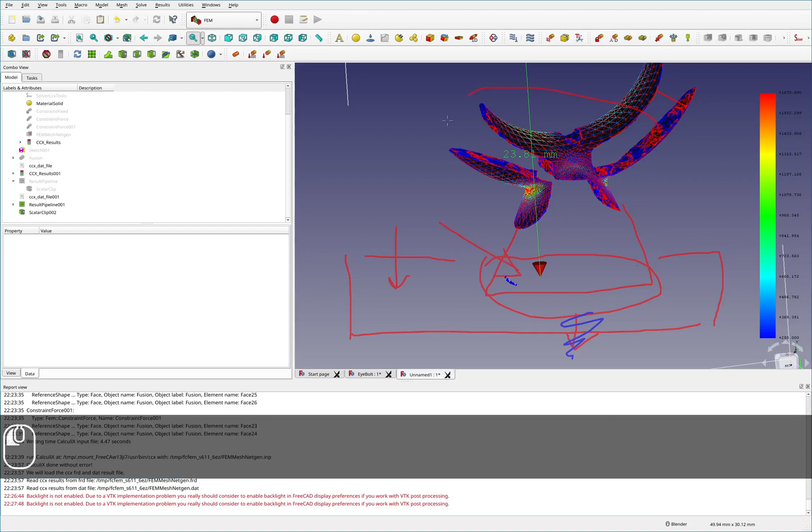Overall, almost identical results. So we can see that simulating the rest of this material down here does not change much, which means that this material and the plate that it's bolted to and the preload here do not contribute. Well, I guess the preload contributes, but that's because we kind of simulated it before, and I'll explain why. But the plate and this kind of skirt thing don't contribute a lot to the resistance to yielding in our simulation, because all of this stuff is kind of up here in the difference.

Although it is possible that if you were to use an eyebolt without the shoulder, without the skirt bit, that it would yield kind of all the way down here, and you would have to simulate that again. So I'm not saying that this skirt is not doing anything. What I'm saying is that the skirt in our simulation is not contributing to the area that is of interest. So we don't have to worry about simulating it with as much precision as we would if it did actually contain the area of interest.

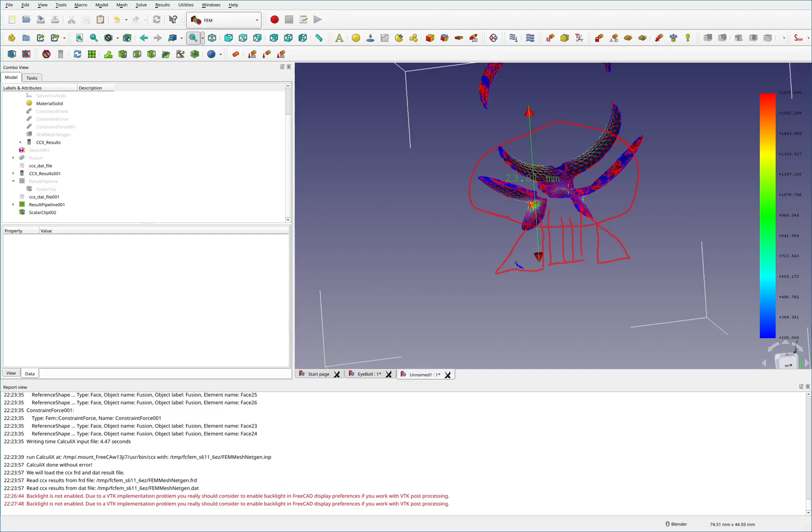And before, if you recall, we had pinned this thing to the ground here, and that actually kind of halfway simulates preload. So it doesn't simulate the skirt being pulled down. But what it does simulate is the entire bolt part being pulled down, because it's the reaction force for our pulling up. So it should be approximately the same for this up direction. And then for the horizontal direction, it's probably almost the same, because the force comes down like this, and this is going to end up with some type of force on it. Difficult to know, but it's probably about the same, so I wouldn't worry about it.

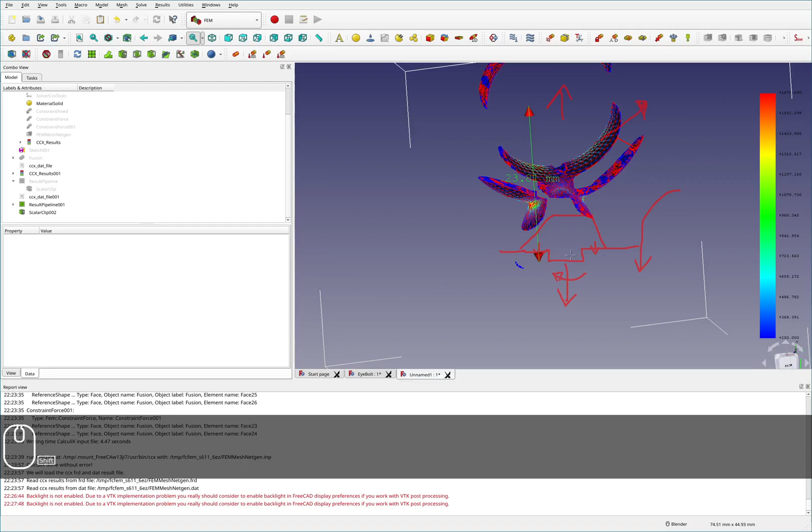But from this, I guess you can learn that you don't need to simulate the entirety of your model. You only need to simulate the section of interest here, and then the rest of it you just need to get good enough, such that it transfers over to the section of interest in a good way. And I guess the important part here is knowing what particular section is actually of interest.

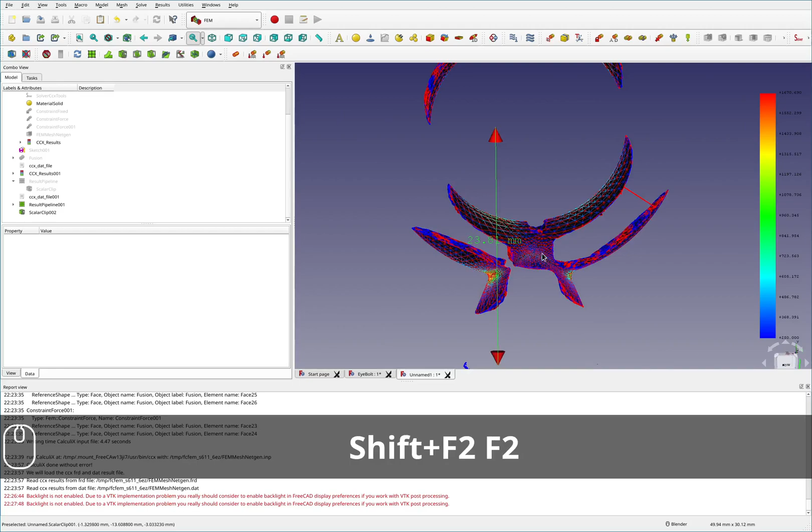So I hope this is interesting, and I hope you learned something from it. I certainly had an interesting time learning lots about the meshing.